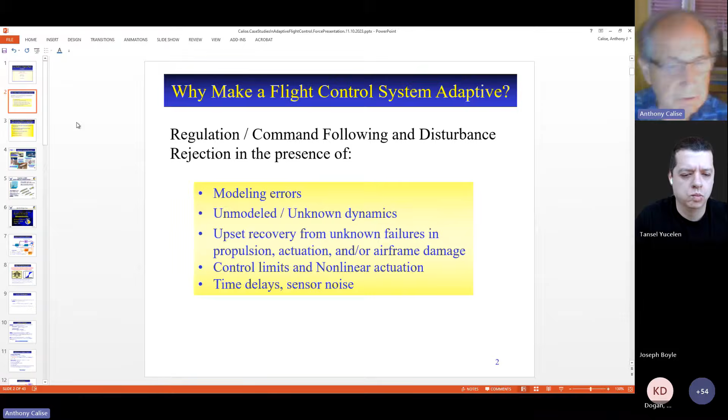I'm going to try to illustrate some of these points during my talk. One of the disappointing things about adaptive control is there have not been very many transitions into real flight control systems.

One of the major obstacles that anyone working in this field will encounter is the project manager is going to ask, why can't I just use legacy design approaches based on linear theory? Why do we need adaptation? And then how do you certify adaptive control systems? Things like gain margin, phase margin, what's the effect of sensor noise, what about control limits? So the key question boils down to: how do we certify adaptive flight control systems? That's a major stumbling block.

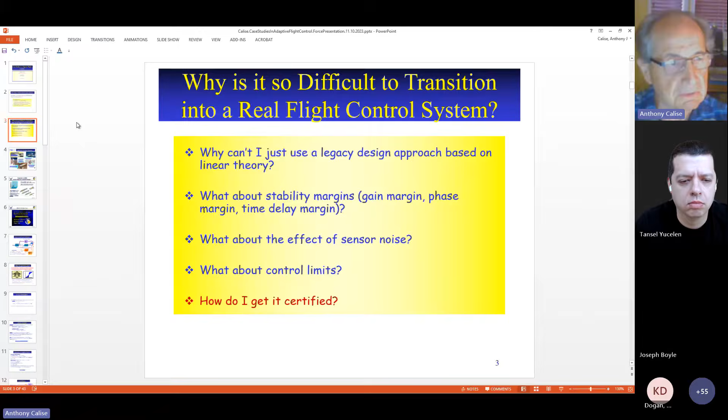This chart illustrates a number of flight demonstrations we did while I was at Georgia Tech. We were involved—most of our funding came from the Air Force Research Lab, also at Eglin Air Force Base, and also from the Air Force Office of Scientific Research.

But there were also government fundings and things like that as well.

There's a key difference between doing flight tests and actually doing what's called a technology transition. Technology transition means you've gone all the way and transitioned the technology into an existing system, and those systems now are flying with that technology.

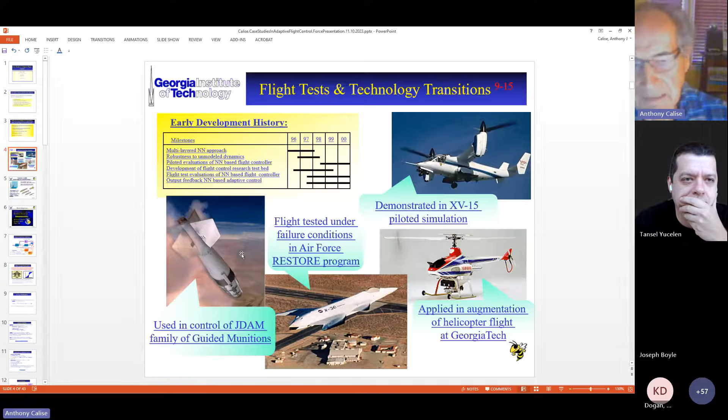The only example I'm aware of where this happened—adaptive control has been around since the 1980s, maybe even earlier—the only fully transitioned example I'm aware of is the JDAM family of guided munitions you see here on this chart. I'm going to say a few words about that and why that transition occurred. First, let me tell you a few words about JDAM.

JDAM is a guided munition. What it really is, is a tail kit. All the intelligence is built into this tail kit, so the idea is you're able to strap this tail kit onto different bombs. The problem is that JDAM has to fly at extremely high angles of attack to get the range, so it's typically released at around 35,000 feet. It's a precision guided munition.

What they've learned is that when you design this in a traditional fashion, it's necessary to gain-schedule the autopilot as a function of three variables: Mach, altitude, and angle of attack. These little dots represent the points about which you linearize the dynamics and design a control system. So that means you have a set of gains—roll, pitch, and yaw—and these gains vary and are interpolated between each of these design points as the JDAM descends.

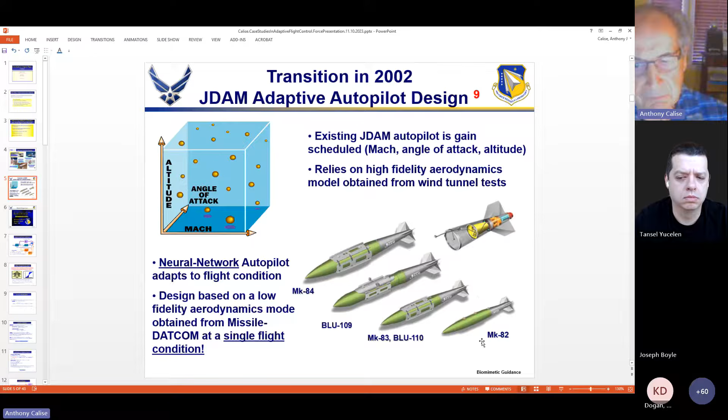That created an opportunity for adaptive control. Today, all JDAMs fly with an adaptive autopilot that requires no gain scheduling, no tuning. They work out of the box—you move the tail kit from one bomb to another, and everything works well.

So I have a little video here of our very first flight test demonstration. Now, let me say before I show the video—the autopilot was designed in my laboratory at Georgia Tech, working with my graduate students, and it took us about 4 months to design the adaptive autopilot.

We were only given flight test data for one bomb at a single flight condition, and in fact the bomb that was actually flown was not the bomb we were given data for. The third thing is that in the JDAM tail kit, even though it has 4 fins, only 3 fins are actuated. So this means you have to very precisely control the roll angle, because there's a very nonlinear dependence on angle of attack, and the data provided was only for a single, positive angle of attack.

Then in the flight test, they did something without telling us—Boeing conducted the flight tests, and they actually commanded negative angles of attack, which was never done before during the drop. So I'm just going to show you quickly here an example of what a JDAM drop looked like.

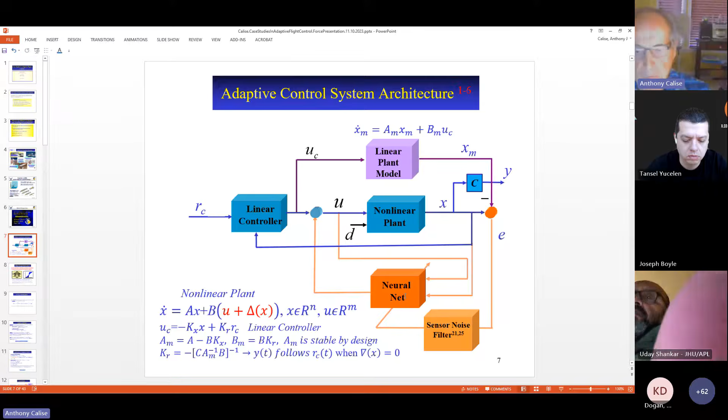Then the other elements here is the sensor noise filter, which is essential. You form an error signal between the actual plant response and the model response, and this is used to train the neural network. So that's basically what's going on, without getting into too much detail.

So why neural networks? Well, the key is that they are universal approximators. And the word neural here is used to indicate that they're somewhat modeled or chosen to represent the way our brains function. We have neurons, and neurons fire, and they interact with neighboring neurons. So we don't really quite understand all of that, how it works.

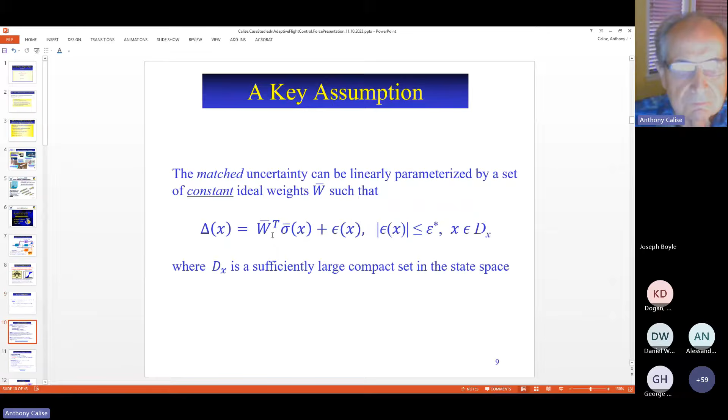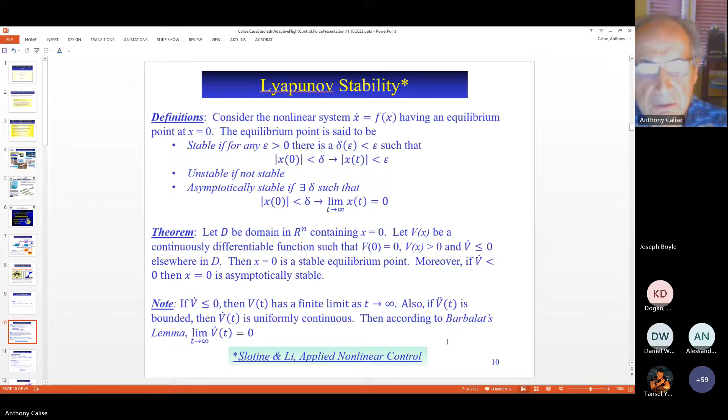I'm not going to go through the details here, this is not really much detail. But I just simply want to say that adaptive control is based on the Lyapunov stability theory. If you are familiar with that subject, then of course you don't really need to look at this chart. But if you're not, I put this chart here just to list, if you want to start reading references, for example, Slotine and Li, Applied Nonlinear Control. This will give you an outline of the key points to look for in investigating, learning about Lyapunov stability theory. And that theory then is applied to adaptive control.

And this chart I put here, again, taken from chapter 2 of reference 34. By the way, I forgot to mention all the references I am citing on these charts appear at the end, and there's a long list of references at the end of the talk that I'll show you.

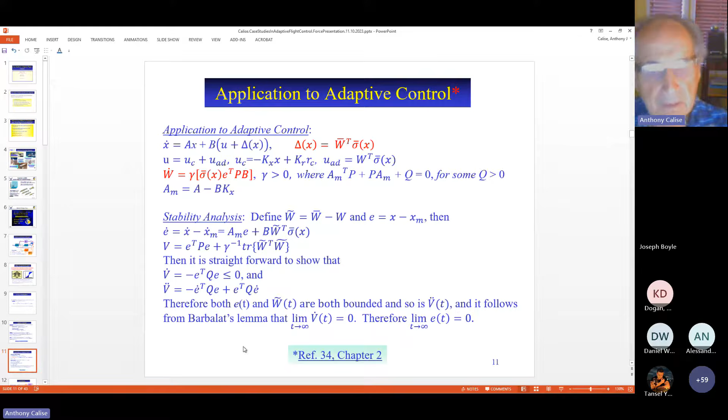Okay, so this sort of outlines how it applies and what the idea is in Lyapunov stability theory. So again, I'm only providing this for those of you who may not be familiar with how one comes up with this adaptation law using Lyapunov stability theory. This is sort of an outline, a guide, if you want to start looking into it.

Okay, so another very important topic that we originated, I should say, one of my graduate students, Eric Johnson, who's online today I think, this idea of control hedging. So what this does is allows an adaptive controller to function even in the presence of things like actuator dynamics, unmodeled actuator dynamics, and saturation. So without this, an adaptive controller would just go crazy if indeed the actuators did saturate.

The idea of hedging is to subtract a signal, a hedge signal, from the plant model that's being used to form an error signal, which in turn is used in the adaptive law. The model for the actuator dynamics and saturation are included in this block, and you subtract that from the command U to form a hedge signal. Without this, adaptive controllers could very rapidly go unstable. References to this topic are cited here, 15 and 22 to 24, given at the end of the talk.

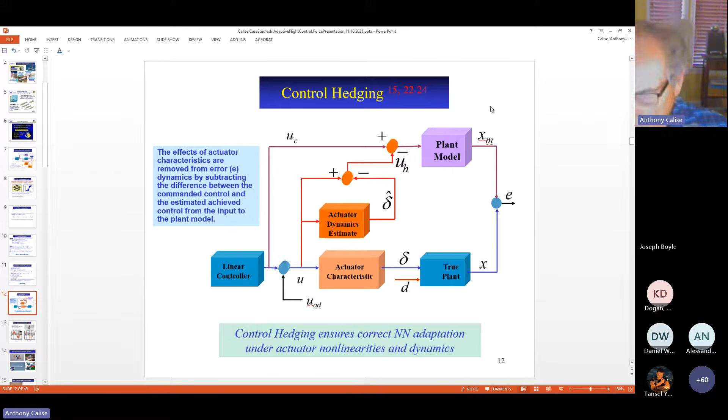Here's an example. This is an actual flight test result with our R-50 helicopter, which we had at the time. It shows what happens when you have time delay, for example. It's a high bandwidth design, out to 10 radians per second, and you have actuator rate and position limits.

This shows an actual flight test result. The green line is the commands in pitch attitude, and the red lines are the responses with the adaptation. This is without hedging. Then when we engage hedging logic, you see that we get very nice command following.

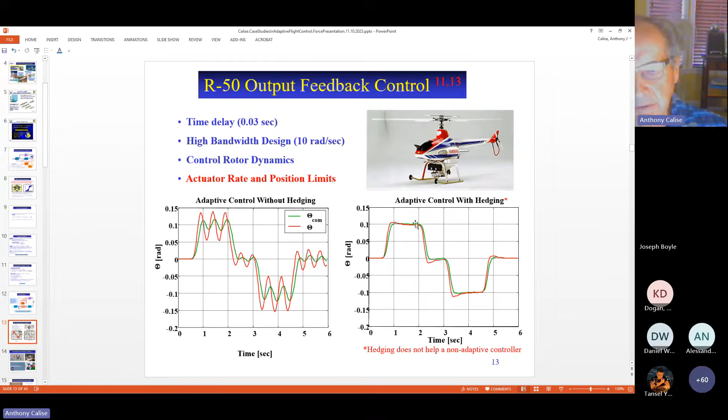Here's a picture showing Eric Johnson on one of our flight vehicles, and also Girish Chowdhary, one of my former graduate students. Eric Johnson is now at Penn State, and Girish is at University of Illinois. They're both professors there now.

One of the flight tests we did was with this adaptive flight control to demonstrate the benefits of adaptive control when you have major catastrophic structural damage. We actually blew off 50% of the wing, as you can see here, during the flight.

That means, of course, you lose a good bit of the aileron control provided on the wing surface on one side. I'd like to draw your attention to this portion showing the wing being blown off, and what happened to the controls—rudder, aileron, and elevator—after this occurred.

As a result of the adaptation that occurred, the aircraft was able to continue following this commanded pattern in the flight. It still did a very good job of flying the waveform, as you can see, even after the wing was blown off.

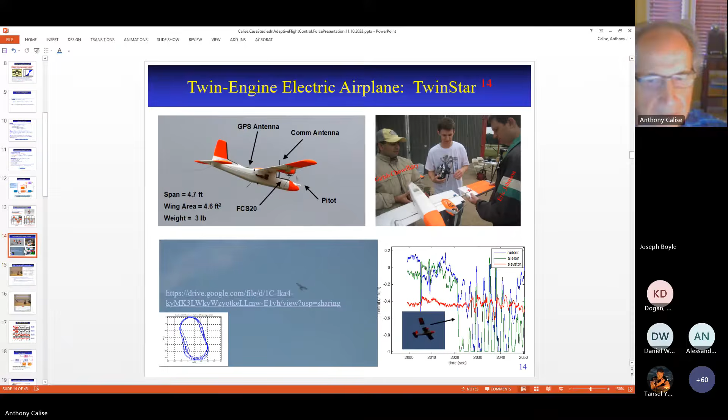We found that if you design a control system using this model, it doesn't behave very well, largely because of unmodeled effects, particularly friction in the model. So I'm going to show you a little video of how this behaves with and without adaptation. You'll see during the video when the network is on and off, and what the behavior is like under saturation.

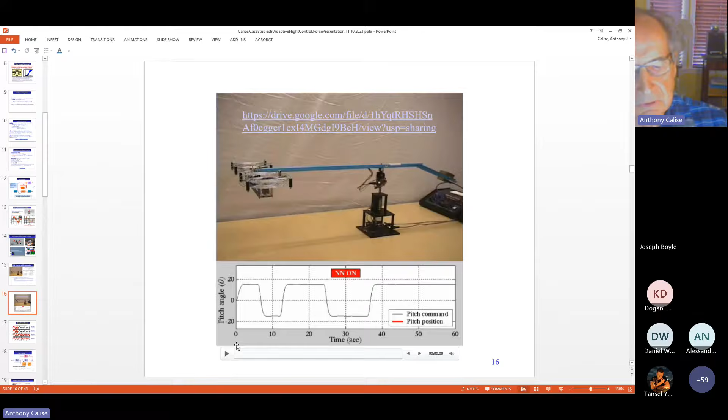At this point, the neural network is on and it's following these square wave commands quite nicely. Then we turn the network off, and you see it goes into this oscillatory type behavior due to unmodeled effects and saturation from friction. It even hit the bottom there, quite nasty. Then I turn the network back on, and now it recovers and starts to follow the commands.

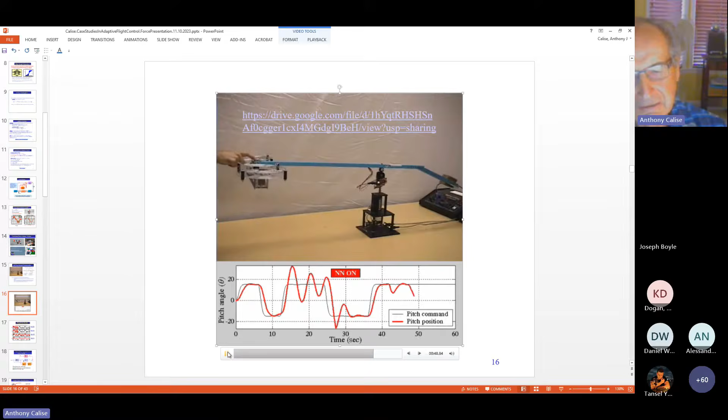Here Ali is showing disturbance rejection. He introduces a disturbance, and then drives it into saturation. You see the network doesn't go crazy—it does recover from that temporary saturation to follow.

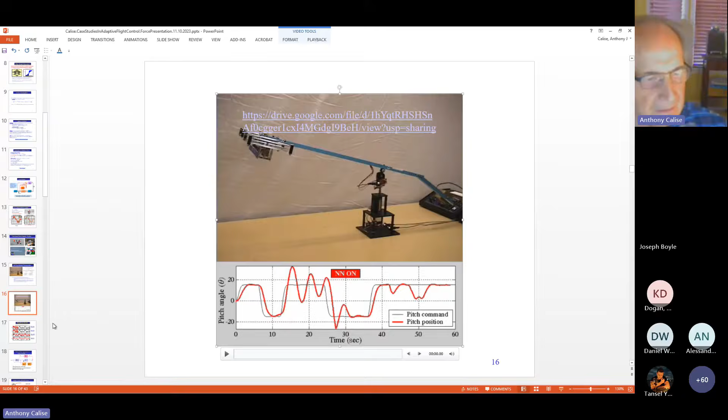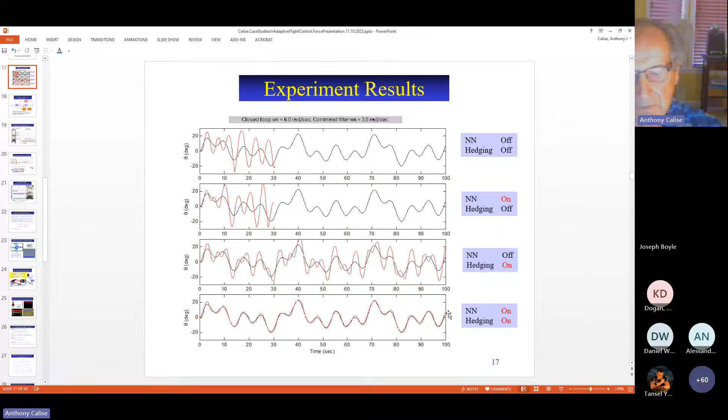We did a lot of work in output feedback. In other words, what do you do when not the entire state of the vehicle you're trying to control is available for feedback? So we call this output feedback control.

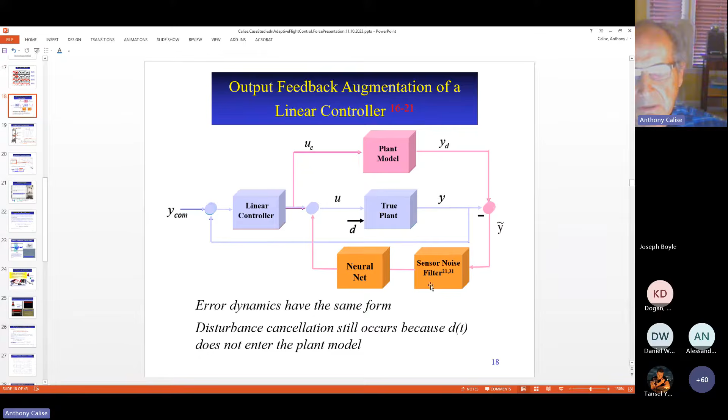The design, the architecture, looks very similar, except now you have an output you're trying to follow, a command you're trying to follow. You have a linear control that only uses the sensed variable y. In other words, x is not available for feedback. But the architecture is very similar, and there's this theory that goes along with this. Again, the references here are 16 to 21.

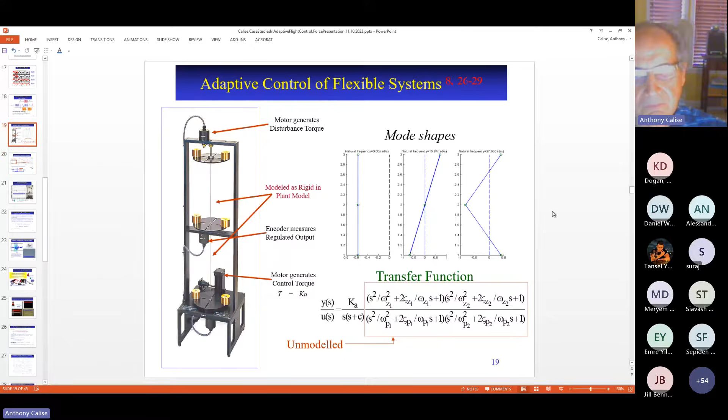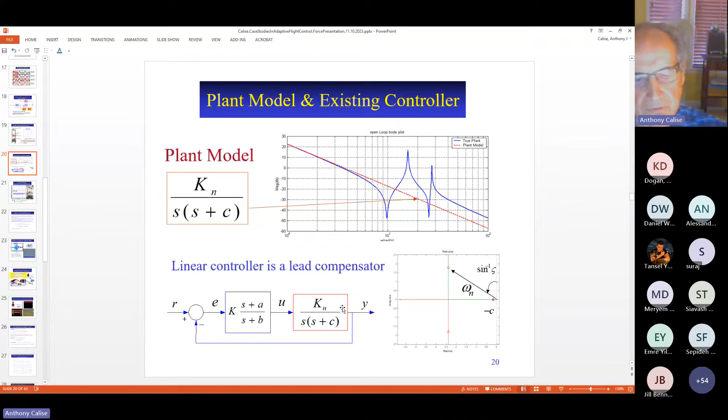So the linear controller is designed using this simple model, and it's basically a lead compensator. This is the transfer function of the controller, and it presumes a rigid model. So this is the simplified model of the plant.

Okay, so I'm going to show you what that looks like when we applied that control design. First, let me show you what's going to be happening here. The linear controller is a linear quadratic Gaussian design, LQG design. So it's going to be first off.

So it's open loop here for the first 20 seconds. Then the next 20 seconds, we turn on the linear controller, and you'll see how the system behaves. And then we'll turn on the neural network in the next 20 seconds.

And then we command a square wave. I had to track a square wave without the neural network. And then after 80 seconds, we track the square wave with the network turned on. So that's what you're going to be seeing during this series.

The thing you want to look at is this center disk, because this is the thing we're trying to regulate. So you see, there's no control at this point. There's a random disturbance applied up here, and it's completely open loop. That's what it looks like.

So now we turn on the linear controller, and you see it behaves a little bit better right here. This is the control signal. This is theta 2, the position of this upper and middle disk. So it's still oscillating around like that.

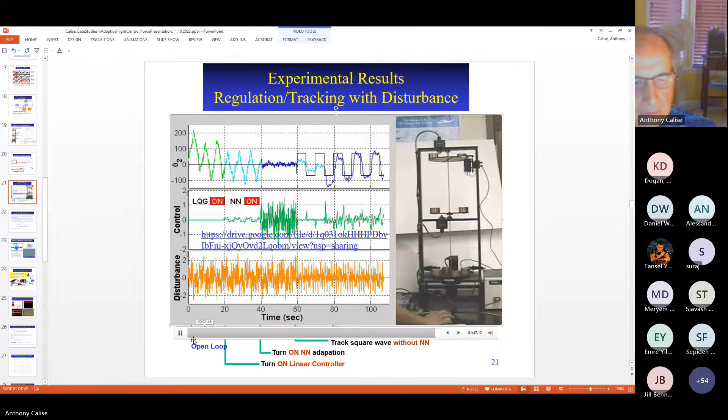There's another topic area called adaptive loop recovery. This is extremely important from the perspective of preserving the gain and phase margins of the reference model. It's also very important if you're trying to certify a flight control system, because with adaptive loop recovery you can claim that you preserve the gain and phase margin of the nominal design. This was the first topic area I gave Tansel to think about when he first came to work with me as a graduate student.

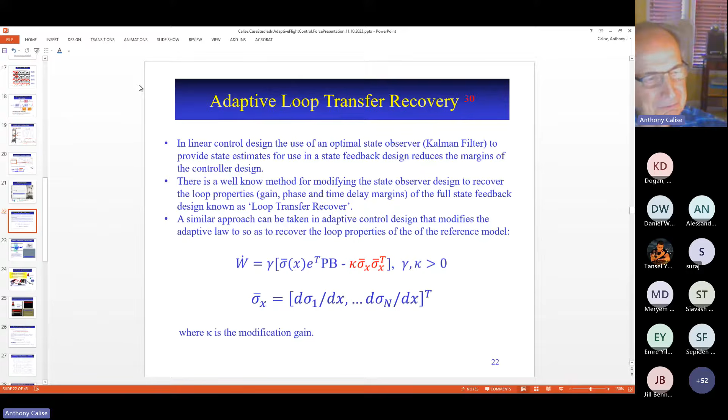There are references for this topic area, and the key reference is number 30. This is a flight demo of adaptive loop recovery.

In this demo, we intentionally introduce a time delay of 0.14 seconds in the flight for a short period of time. In this green shaded area, this is the flight test response. The ALR, adaptive loop recovery, is turned off and then turned on again, and you see the behavior in the pitch rate recover because of this ALR method of augmenting adaptive control. There's a little illustration here of the flight when that occurs - you'll see the aircraft start to pitch a lot. This is the ALR turned off and then recovered.

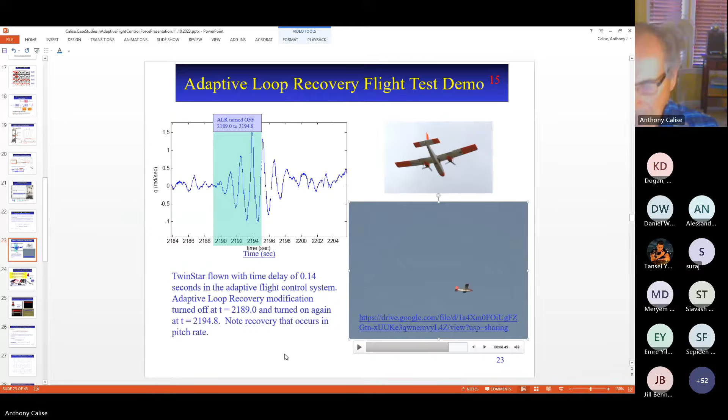Another area where adaptive control can play a very important role: these days there's a large movement towards designing new aircraft that are either augmented with, or don't actually need, moving control surfaces, using flow control devices instead that can completely eliminate the need for moving control surfaces. The question is, what would new designs look like if you had this capability installed?

The idea is that you use an array of active flow control devices distributed along the wing surface. There are basically two types. One is called synthetic jet, where you have a disc that vibrates, so there's no net flow of air, which is why it's called synthetic jet. The other is distributed bleed, where you suck air in and release it up in the front, and you can affect the lift on the wing surface.

The reason neural networks can play an important role here is that you're now dealing with an array of sensors and an array of actuators, rather than single actuators and single sensors. The idea is to design a nominal control that takes the average effect of all these elements into account, but then augment it with a neural network that can individually account for differences between these sensors and actuators based on their locations on the surface, which are unknown - it's very difficult to model the differences between a sensor at one location on the wing versus another. A neural network is especially useful for feeding in all these inputs and providing individual outputs to each sensor and actuation element, augmenting the nominal control design in that fashion.

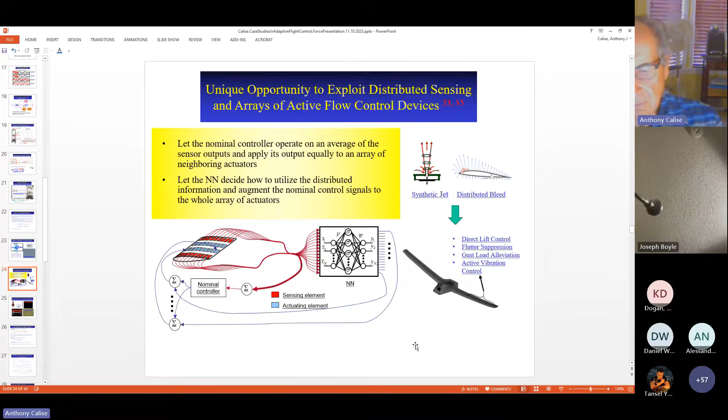We have both laboratory and flight test results to illustrate this behavior. This shows that we can move surfaces in a tunnel - here it's a vibration. The goal is to remove this vibration caused by the fluctuation in the airflow, and you can see the vibration essentially goes to zero without any moving control surfaces. It's all done with synthetic jet actuation. And this shows that we can...

Ari Glezer designed and operates these wind tunnels, and did all the work related to synthetic jet and distributed bleed actuation. This is a flight test we did without any moving surfaces.

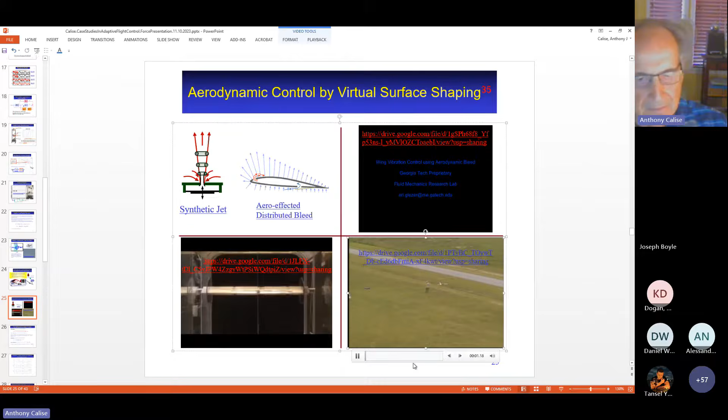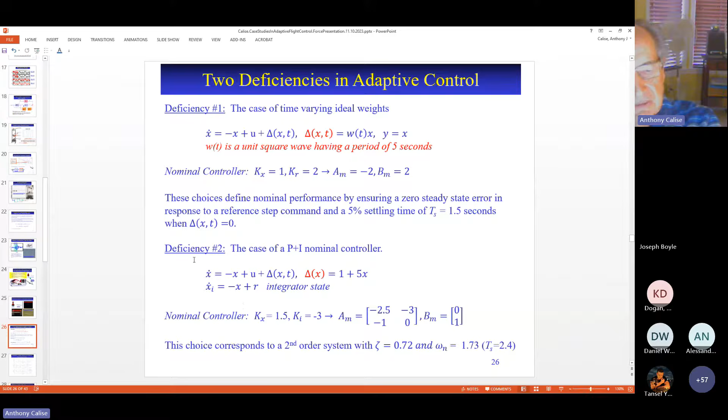So that's why they're employed, basically, in flight control design. In this case, the W is constant, it's this 1 and 5 here, but there's an integrator state to implement the PI control. This is a second deficiency I'm going to point out.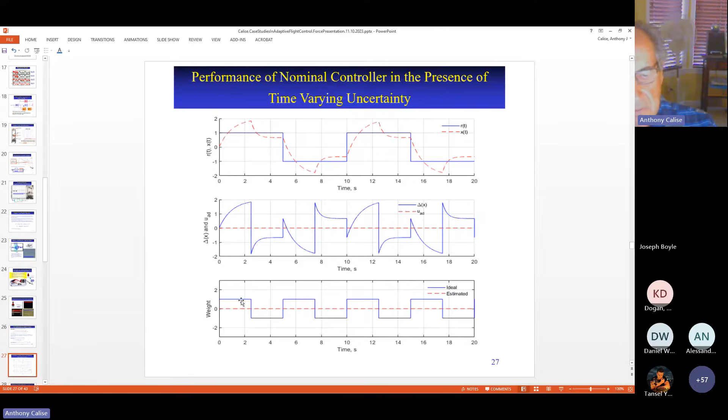So here we are in the first case, which shows performance of a nominal control in the presence of time-varying uncertainty. Nominal means there's no adaptation. Here's the square wave command, and the response looks like this. In this case, the adaptive signal is 0 because there's no adaptation. This is the delta that goes along with that response, which is the uncertainty in the system. The ideal weight is the square wave, as I mentioned before, and the estimated ideal weight is 0 because there's no adaptation.

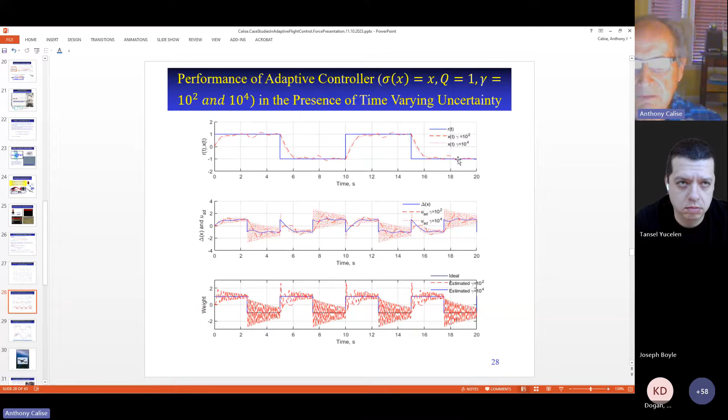Now if you turn on the adaptive controller, I'm showing results for two sets of adaptation gain here, gamma 10 to the 2 and gamma 10 to the 4. The dashed line is 10 to the 2, and the dotted line is 10 to the 4. You see what happens is, now you're able to track, but it's kind of a wavy tracking, as you can see. The other thing is things get very noisy in the adaptive portion of the signal, especially at this high adaptation gain, 10 to the 4. This shows its estimate of the weight. So it's estimating it, but it gets a very wavy kind of estimate, and at the high adaptation, the estimate gets very noisy.

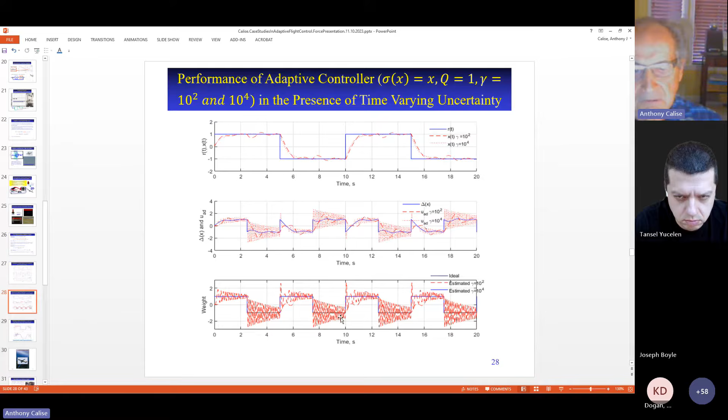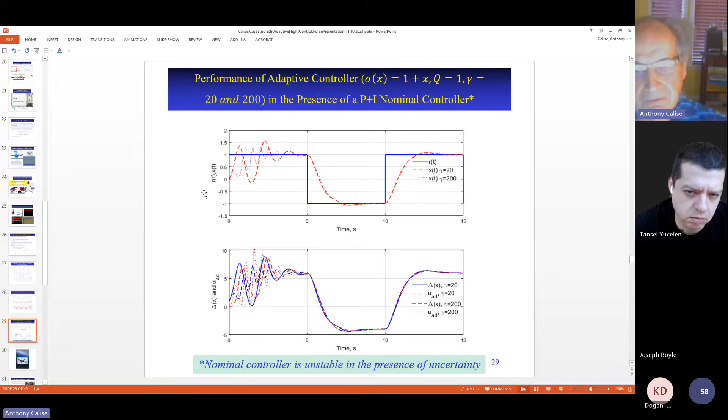So basically what's occurring here is, remember, adaptive control requires integration. And that numerical integration of the adaptive law can conflict with the integration occurring in the nominal controller. They may actually be opposing one another for a period of time. So this shows a second potential deficiency.

All of which leads us to the main thesis topic area of Professor Yucelen. When he came as a graduate student, this was the main subject of his PhD thesis: derivative-free adaptive control. In other words, can we have adaptive controller design that does not require numerical integration to obtain the ideal weight history? So he called it derivative-free adaptive control. We actually have a book on this subject that just appeared this past month, which goes through the theory, covers a lot of experimental results, and talks about potential future research in this area.

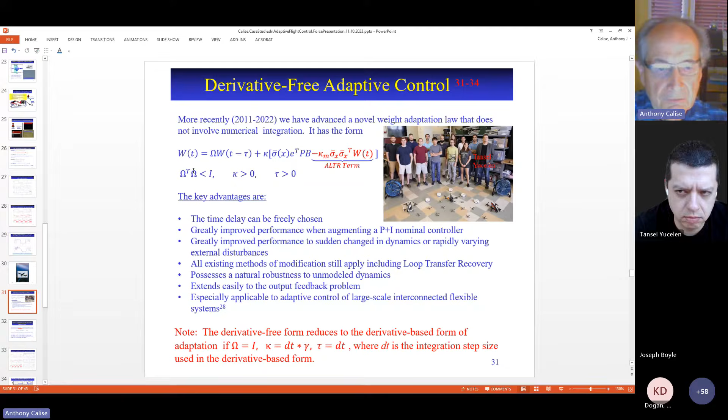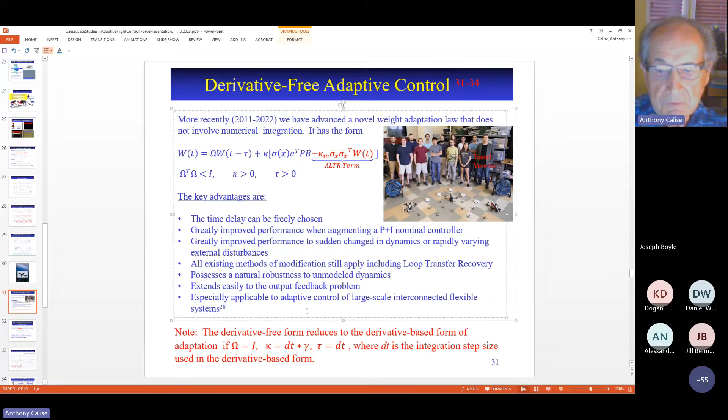So the key advantages here are that the time delay can be freely chosen. This parameter tau introduces a new design parameter. We get greatly improved performance when augmenting a PI controller, and greatly improved performance with sudden changes in dynamics or rapidly varying external disturbances. All existing methods of modification still apply, including loop transfer recovery and E-modification. It possesses a natural robustness to unmodeled dynamics even. This is a key point, because conventional adaptive control does not have a natural robustness to unmodeled dynamics. And it extends easily to output feedback, and it's especially applicable to adaptive control of large scale interconnected flexible systems.

So the key difference in derivative-free is the underlying assumption. The underlying assumption is that the uncertainty delta can be linearly parameterized by a bounded set of time-varying ideal weights. In other words, the ideal weights now can be time-varying.

They no longer have to be constant. And that was what provides all of these benefits.

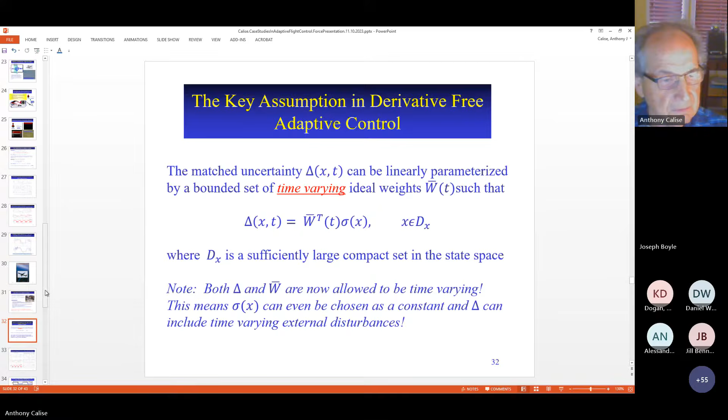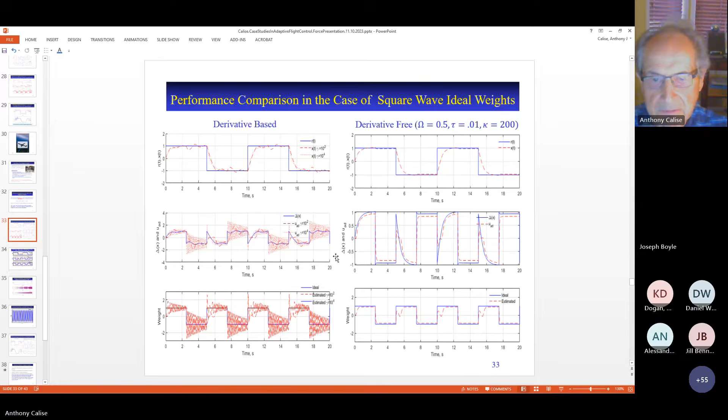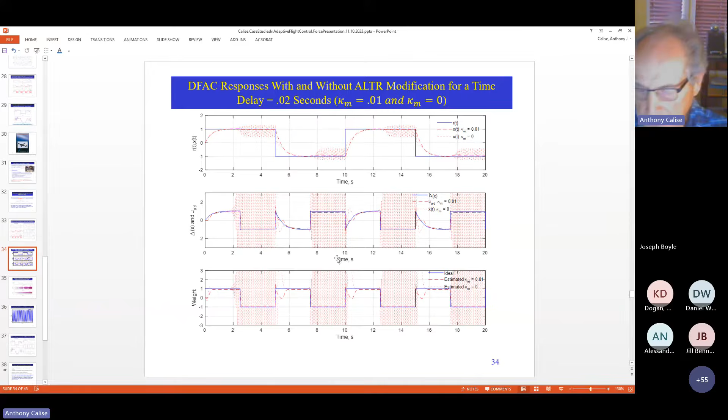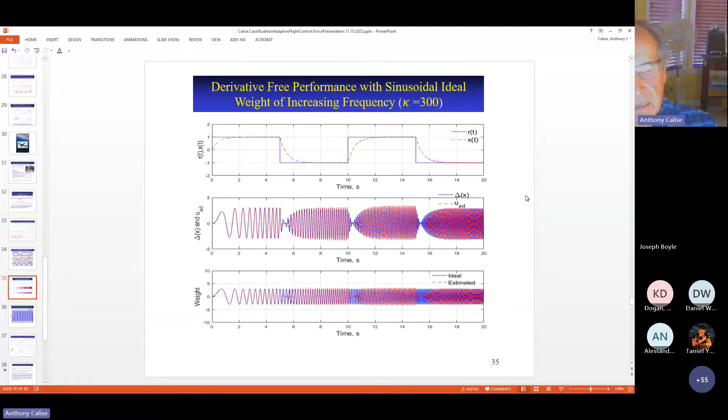And here to further illustrate how effective derivative-free adaptive control is, we made the weight, instead of a square wave, a sinusoidal weight with increasing frequency. So here the weight starts out at low frequency and gradually increases to an extremely high frequency. And you see, we still get very, very accurate tracking, not only of the command, but also the weight estimate. So this shows the estimate of the weight at the high frequency end. Even at the extremely high frequency end, the adaptive design is estimating the ideal weight.

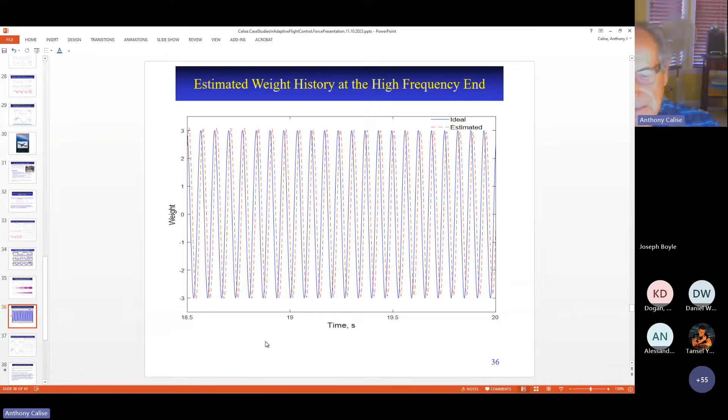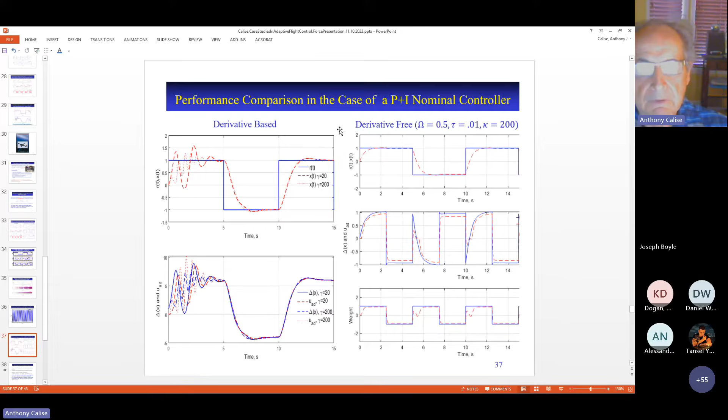Okay, so to summarize, benefits of adaptive control: it provides adaptation to both parametric uncertainty and unmodeled dynamics, adaptation to uncertainties and nonlinearities in actuation, improved rejection of external disturbances, rapid upset recovery under failures and airframe damage. It permits higher bandwidth design by maintaining adaptation under control saturation with the addition of hedging. Now, this is very important when you get to aircraft like fighter aircraft or hypervelocity aircraft, where you require high bandwidth control. And this is one means to achieve that, even when you have control saturation.

And ALR modification, adaptive loop recovery, may be one of the key stepping stones to certification by maintaining the gain and phase and time delay margin of the reference model.

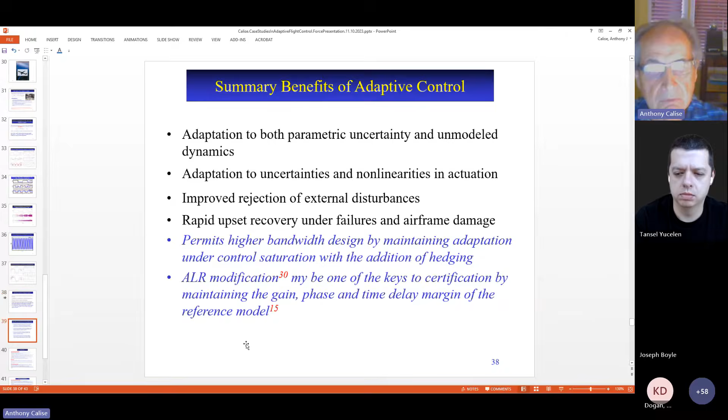I also provide here some recommendations for future research for those of you who might be looking for a thesis topic. This is also listed in our textbook, in chapter 8.

So you have adaptation to unmatched uncertainty. Is there an adaptive equivalent to proportional plus integral linear control that cancels the effect of unmatched biases and other dynamic modeling error effects? Proportional plus integral control, the uncertainty does not have to be matched. So is there an adaptive control approach equivalent to that? No one's ever really solved that problem.

There are many properties of derivative-free adaptive control that have not yet been extended to the output feedback case. They are listed in chapter 8 of the textbook I mentioned, that's reference 34.

Can we develop a more systematic method for selecting the design parameters in adaptive control? And then the final thing is that systematic measures of robustness, things like gain margin, phase margin, time delay margin, are very important if you want to be able to successfully transition adaptive control theory into practical systems.

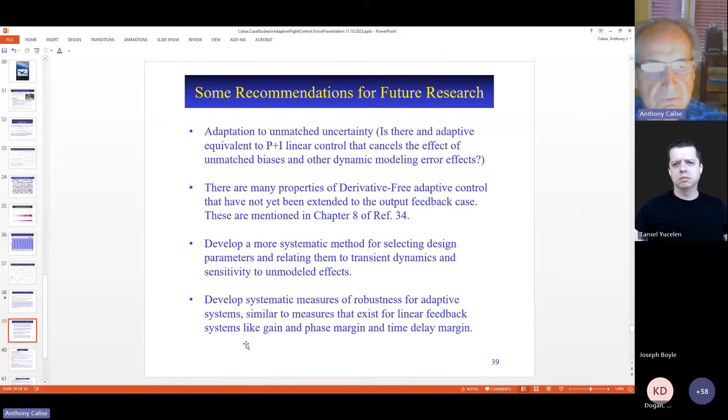And finally, I want to conclude with a saying that I think is very apropos even today. It's a saying attributed to Hippocrates. I'm sure you've heard that name. He's a philosopher and physician born around 460 BC, and is regarded as the father of medicine and revered for his ethical standards and the Hippocratic Oath.

And this is one of the many sayings that you can find in the literature from him, but I particularly like this one. And it's very appropriate for young students to be attentive to this. It is through error that one tries and rises. It is through tragedy that we learn. All the roads of learning begin in darkness and go out into the light. And I derived the meaning from this: don't be afraid to make mistakes. What's important is never give up.